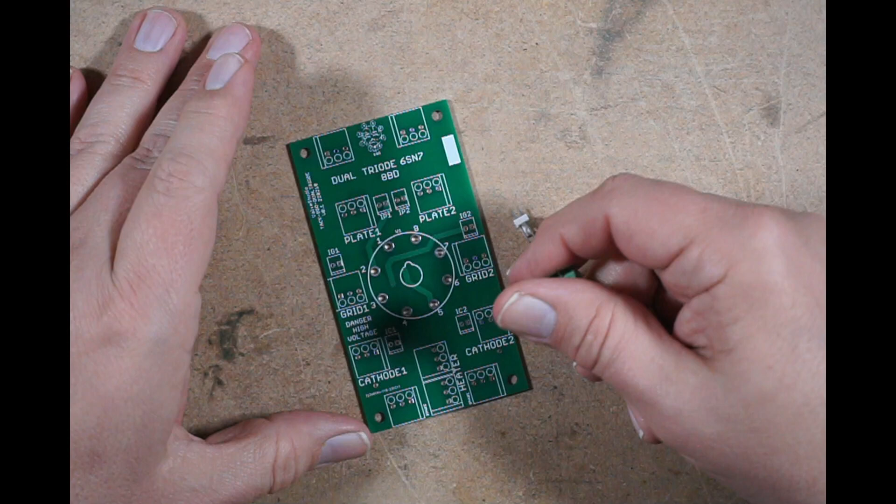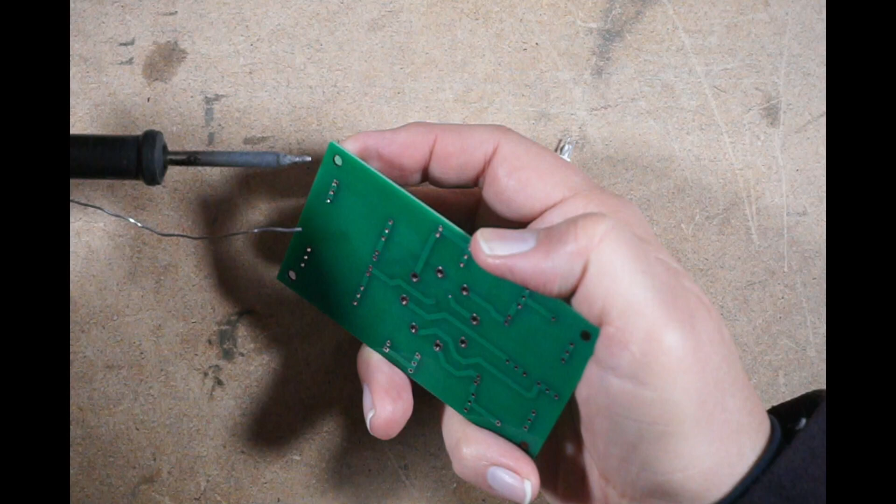Here's my project for today. Let's say I'm going to build this board, which is full of connectors. And you want to solder these connectors on the board. These are all through-hole parts on here. So you put a part on, put your finger on there, hold it on the board, get your soldering iron out, get your solder out, and somehow you miraculously hold all four of these things all at the same time.

And these two pin headers are particularly troublesome because when you hold these guys, you're going to end up burning your finger because the heat transfers right through these pins. So I have a better solution for that. I'm going to show you that today. This is a 3D printed assembly jig for soldering parts on boards. This has got a lot of different compartments at different depths.

So to build this board, you put all your parts on, and you put your assembly jig on, turn it upside down, and solder everything in. And this jig, I've determined all these heights for the different components that I have, and all the components are going to sit flush, and you can check that on the side here. And there's a little bit of an offset here, so you can actually look in and see how your parts are sitting on the board.

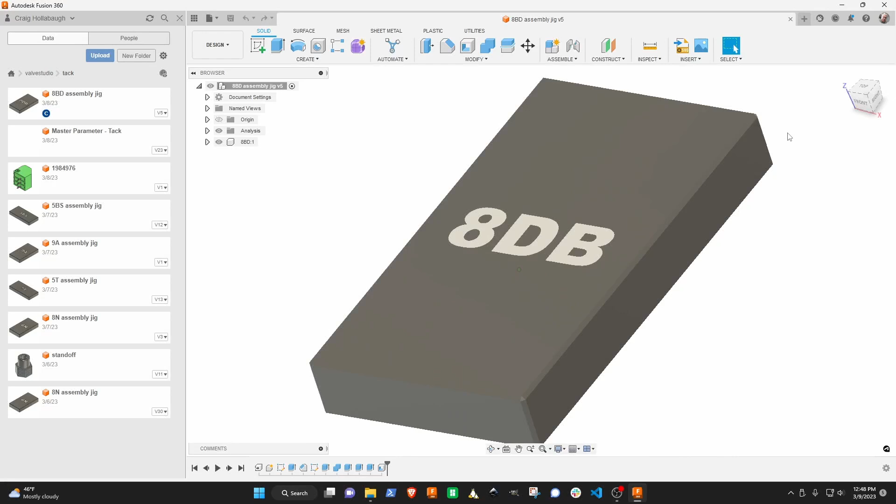If you'd like to see how I modeled this 3D printed jig, well, we're going to start right now. All right, here's the model for that 8BD jig that we just saw. And I'm going to show you how I modeled this up using Fusion 360. Here's the board layout for the 8BD board, which is an octal dual triode 6SN7. And what I want to show you is when I model these parts in the parts library, I made sure that the border outline for the parts actually measured exactly to the part. For the octal socket connector, the 2-pin header, as well as this 3-pin connector here.

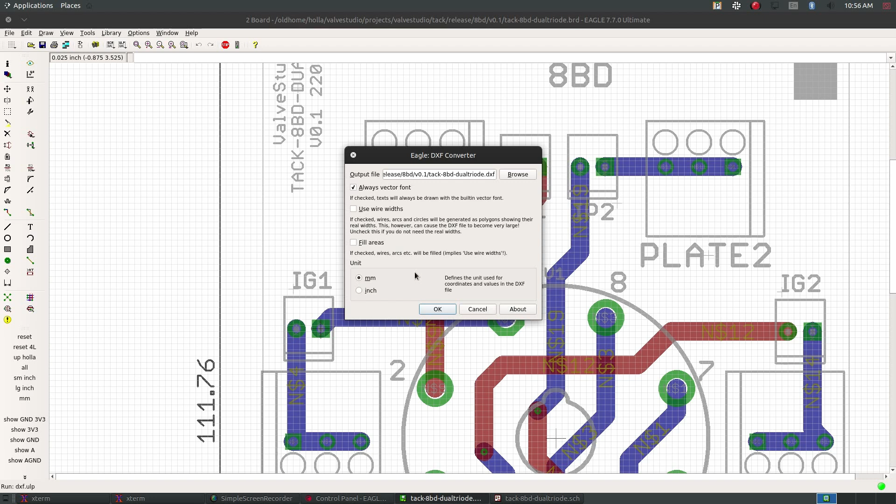This version of Eagle allows me to export out a DXF file of the board itself, turn off things I don't need. I'm going to export it in millimeters. And there I generated a DXF file that I can import into Fusion 360. Let's first create a sketch on the top plane, and we will insert that DXF file that I created. And here it is right here. We'll bring this in.

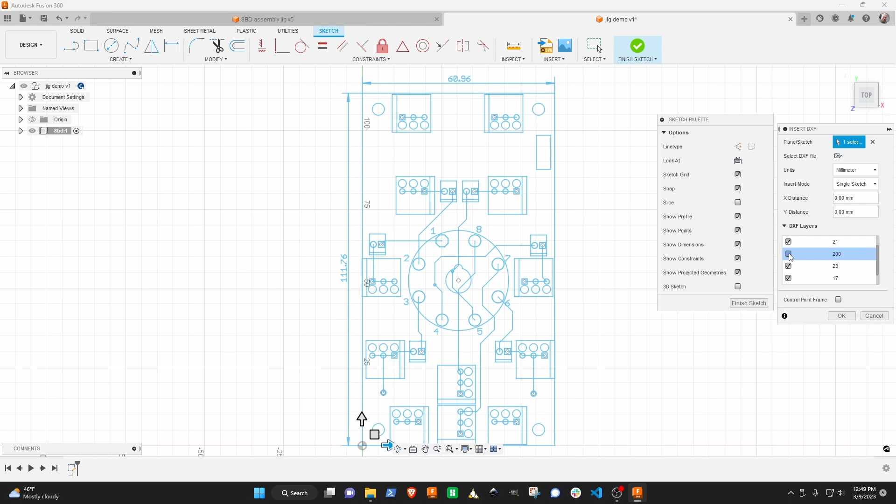And so you can see over here in the dialog box that there's a bunch of DXF layers that we don't actually need. So let's see, number 20 is the board outline. We need that. 25 is the letter silk. We don't need that. 39 is the screw head diameter, the keep out region. We don't need that. 21 is the part outline. We do need that one. 200 is a board graphic. We'll take that off. 23 looks like drill holes, something with vias. 16 is the bottom side copper, and 1 is the top side copper. And 18 are some via holes.

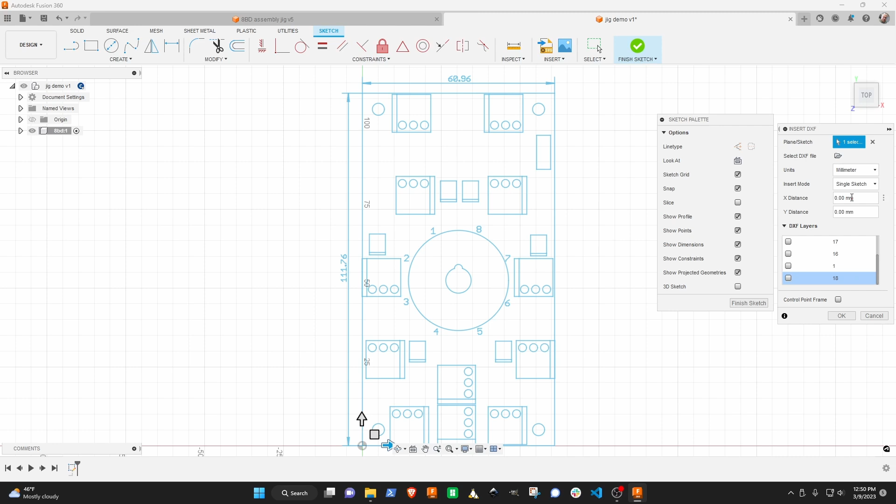Okay, so we'll start with this, and we also want to offset this from the origin. We don't want to be locked in the origin. We'll talk about why that is in a minute. Okay, so we're still on a sketch. Now, I'm going to go in and delete a bunch of stuff that I don't need. So just kind of come in here. We're going to delete this stuff, and you don't need to watch me delete all this, so I'll just speed this up right now.

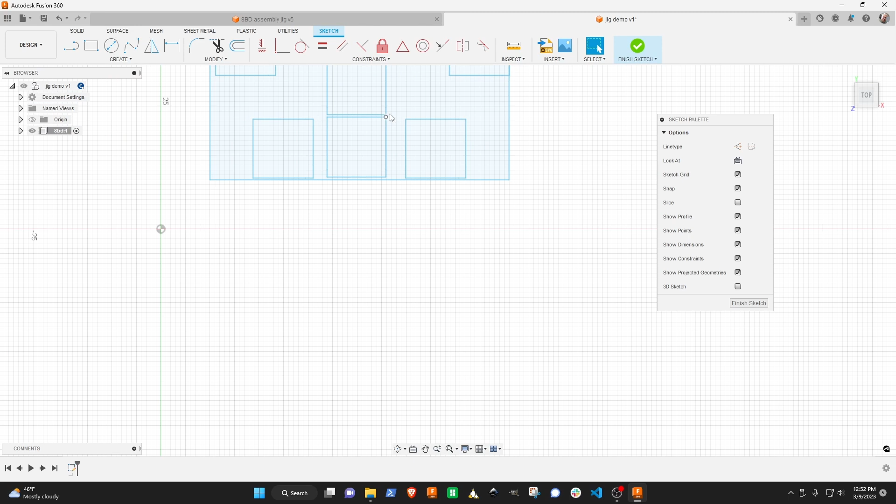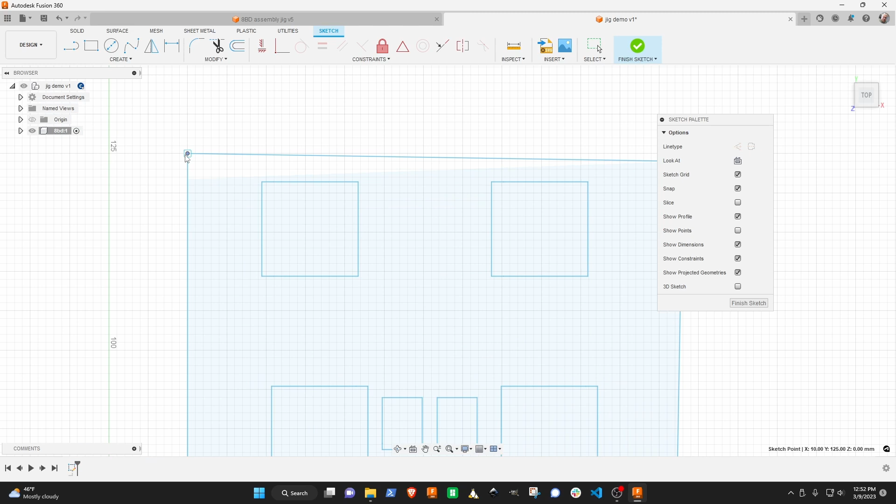All right, so now we have our sketch here. And just from doing a bunch of these, I'm going to tell you that we need to make this outline a little bit bigger. So let's go back in and change that a little bit. We could just drag these corners up, and since I have this snap on, we'll go ahead and snap up to some corners so we can get these lines to be straight.

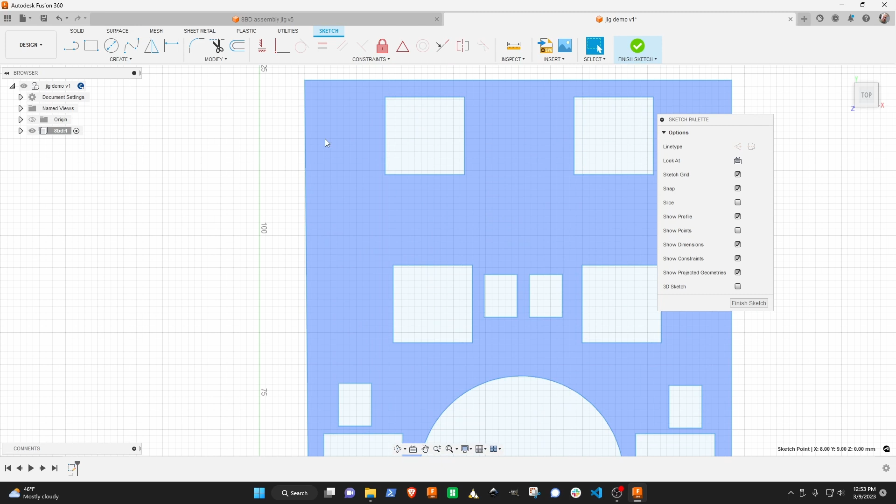So I'm going to come over here like that, and I'm going to move this one over. Okay, so it looks like that. That's probably a little bit too much. We just come back a little bit. Okay, so this one's pretty close. Now these are the exact borders of the parts.

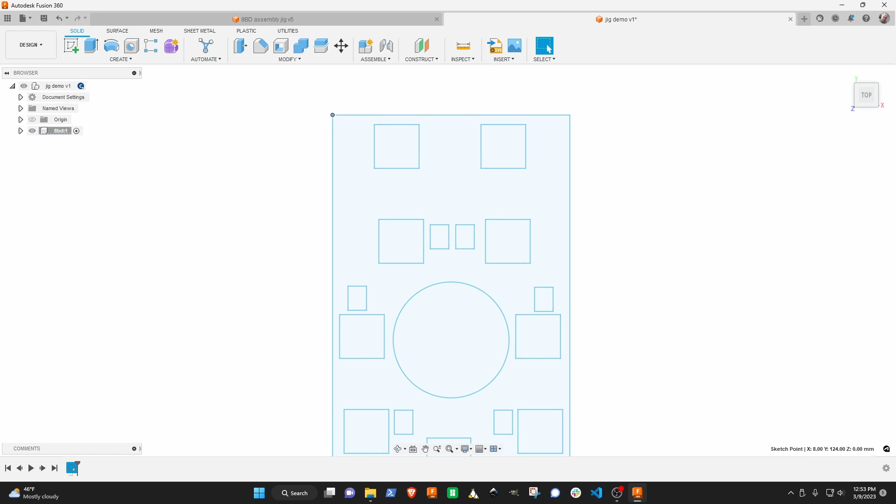So we need a little bit of clearance in here. And so we can use the offset tool under sketch. We can pick that and then we can choose some offset here. But I don't want to type this number in all the time, so I want to show you what I ended up doing.

Over here, you can see I've done a lot of these jigs already. I'm inserting a design into the jig design files that I'm just calling master parameter. If you look in here, there's no actual parts, no bodies, no sketches, nothing, except for the parameters in this file. These are the various parameters that I need to do these jigs. These are measurements that I took, and I actually printed a few of these things and got the spacings

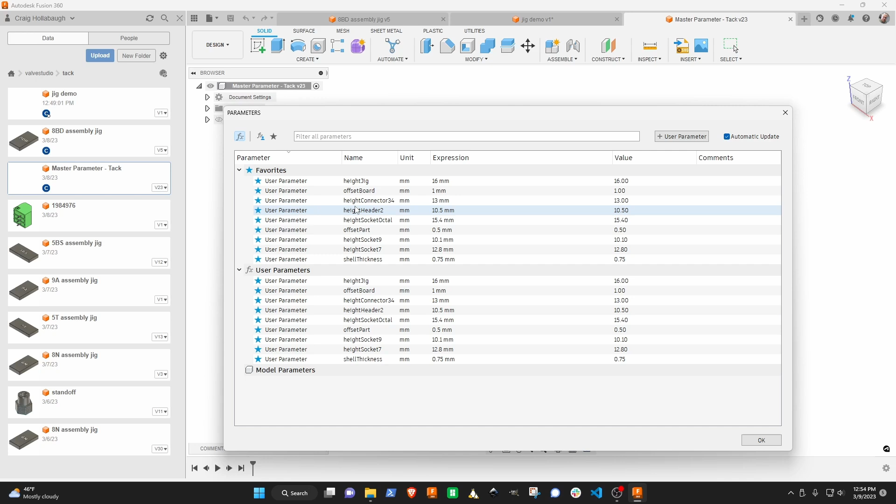all correct. So what we're going to do over in our demo file is first insert a derived file. We're going to pick that master file. You can see here that I can bring in objects from that file, or down here under parameters, I can bring in the favorites.

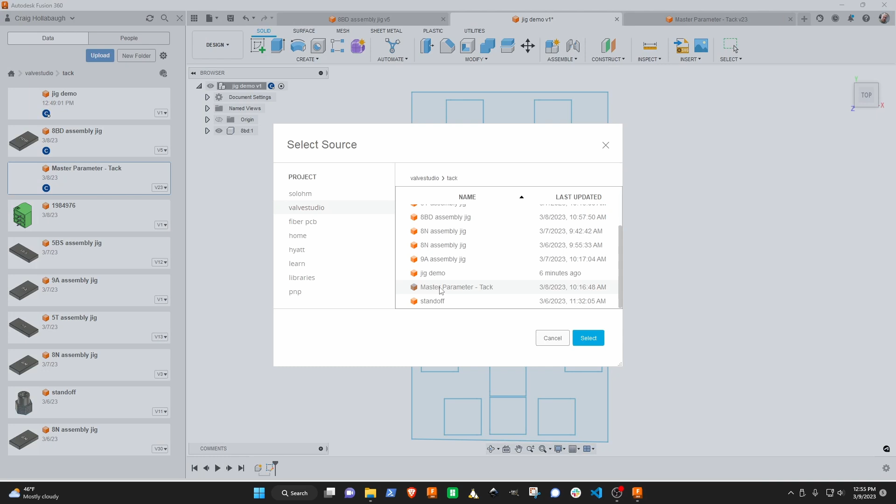Now if I come over to my parameters, you'll see that I have, oh, I didn't do that right. Let me do that again. In order for this to work right, I need to be up here at the top level. We'll bring that back in again. Okay, so we're going to come down here, click on that, and bring in the favorites. Now when I come down, you can see that it added this derived from the master parameter file.

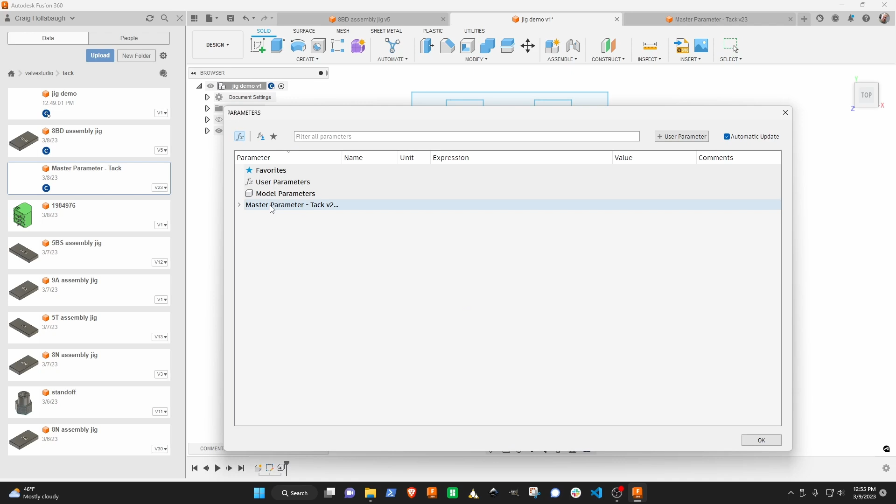If I come down to my parameters, you'll see that the master parameters are brought in to this design. However, they're not actually in this design until I make them favorites. So I bring in the parameters that I want. I can bring them all in. Since we can drag things around in our timeline, and we need these parameters for the entire design, I'm going to slide that all the way to the front. And we'll save this now.

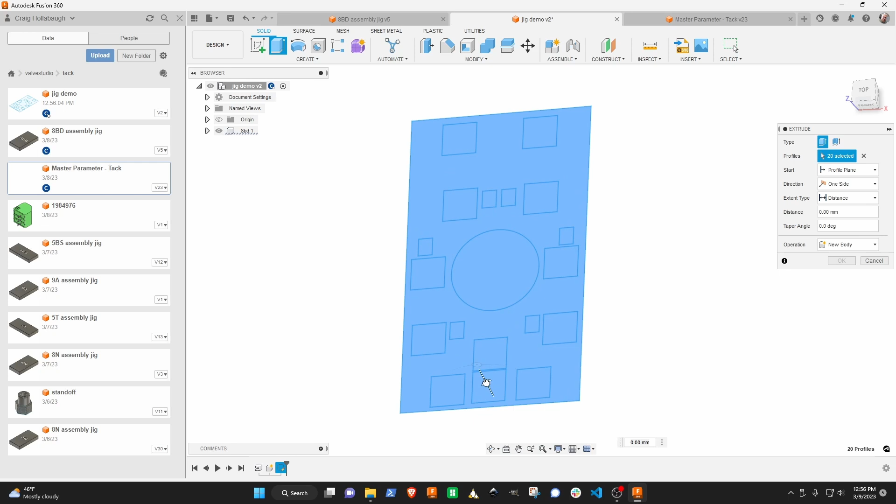Okay, so let's go back in and edit our sketch. The first thing we're going to do is create those offsets using this tool here, and I can create a bunch of them all at once. Well, first let me show you something else. Say I want to do an extrude, and I extrude this whole part up. Remember, we're looking down from the top, so the parts are actually on the top of the board. If I did it this way, now this is looking from the bottom side. Now if I extruded these parts back in

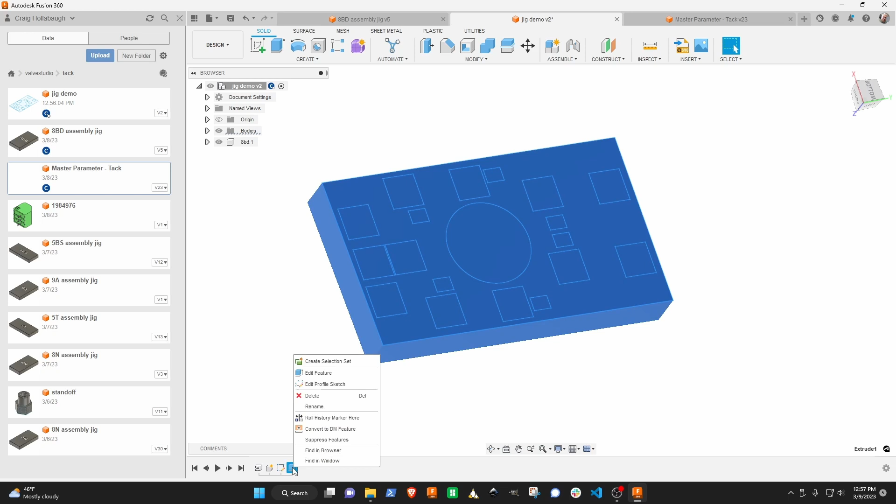and say that this is my jig, this border is the exact outline of the part, and we need to put a little bit of an offset in there for tolerance around the part. So let's delete that extrude and go back in. Let's go add in those outlines. I always want to work on the top side of the board; this is me looking down onto the board. So I need to add these offsets around all the perimeters of all the parts.

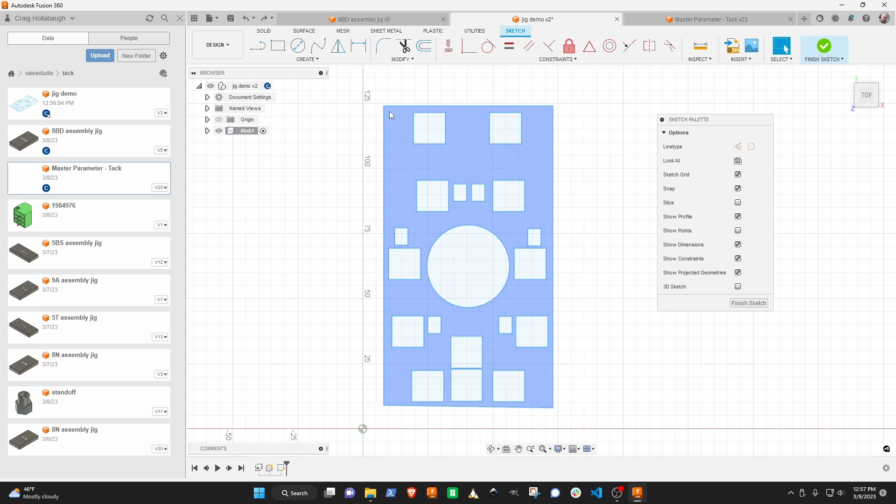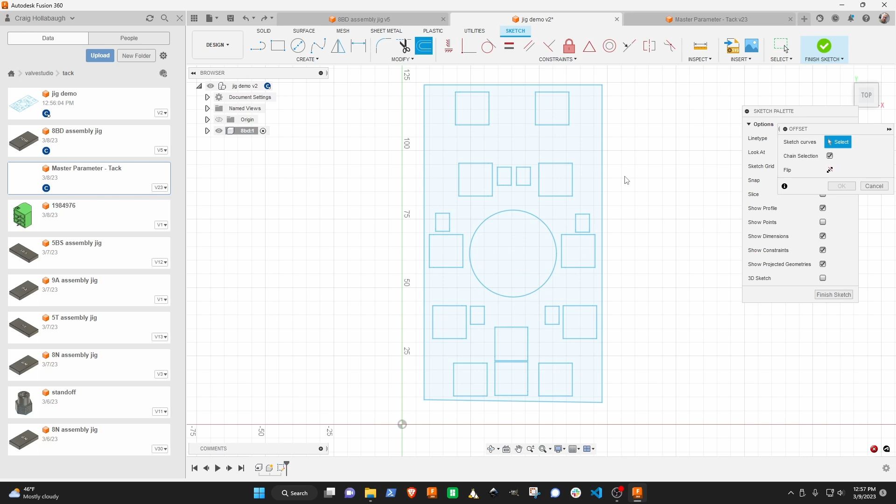So I think that I can come in here and select all these things. I think I can just do it like this. Okay, so now I have all the part perimeters. I can apply an offset to all of them. And I get an error down here that says it can't offset the curves. Okay, so let's do this again. We're going to select all the rectangles, deselect the circle in the middle, hit offset. Except I grabbed this line over here. Let me try this one more time. Turn that off, turn that off.

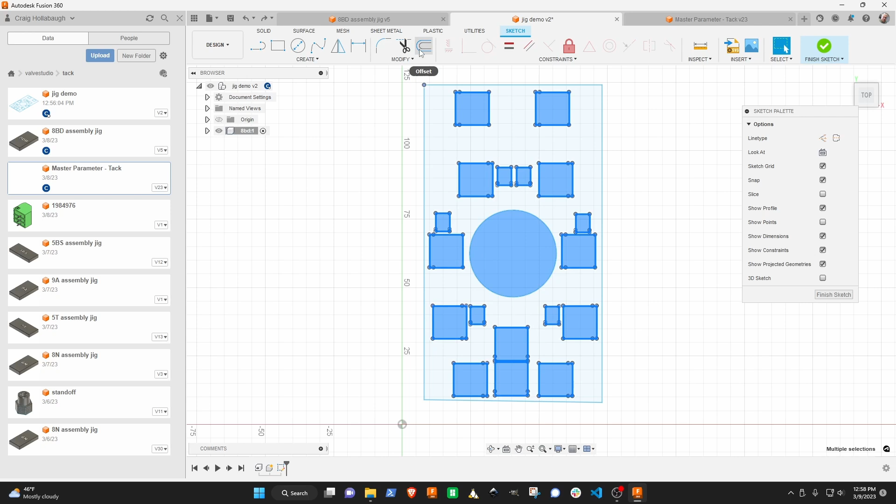Okay, so now I just have the inside perimeters highlighted, and I'm going to hit the offset key. I have a parameter for this offset, and I think it's offset part reference. You also see that these parameters came in with an underscore reference on them, which means it's coming in from my derived file. So that's correct. Now I can set this offset for this part. Same thing, I can name it offset part. And so now we have all the offsets in there.

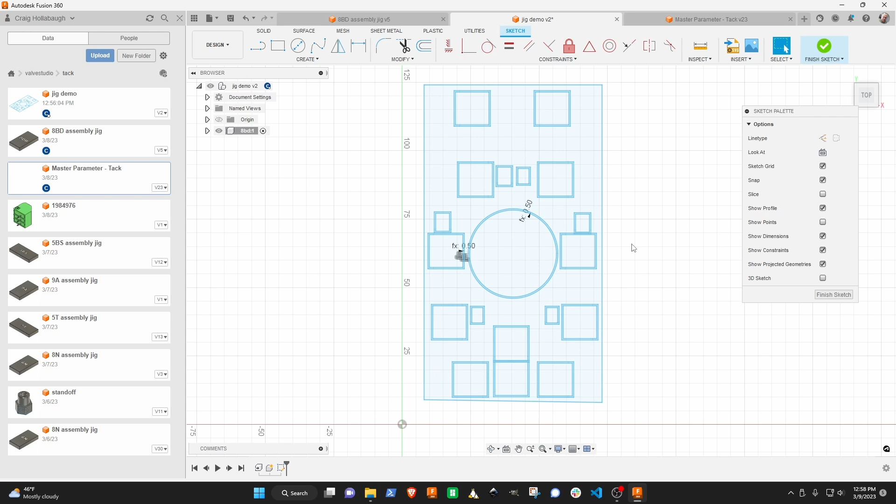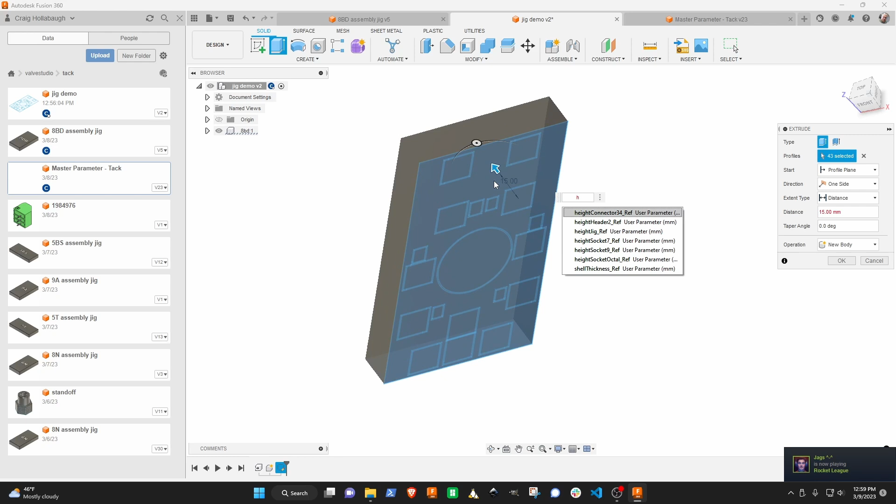So we're going to do our first extrude. Finish that sketch, and we're going to extrude this up from the board by a height that I call height jig. In this case, it's 15 millimeters. So this is what the jig's going to look like. We're going to push some of these down, extrude these down and do some cuts into this part.

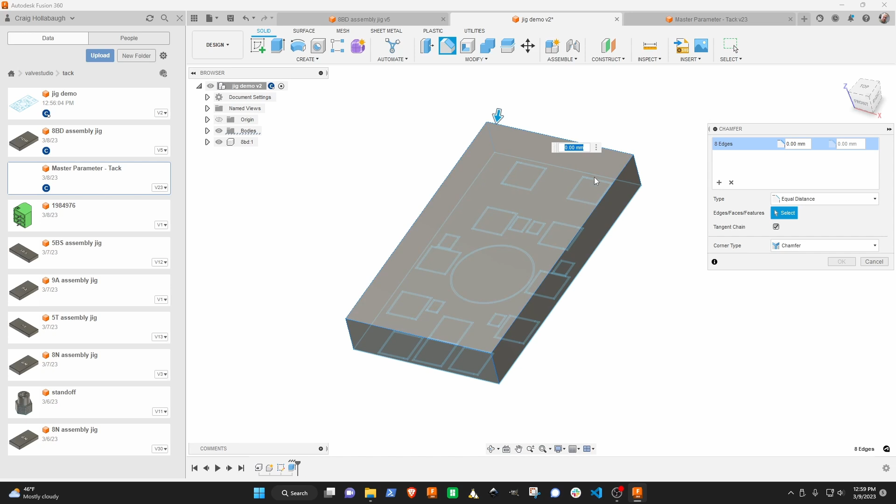But first, let's go ahead and add some chamfers to this body, because we don't want all those sharp corners everywhere. We'll make it one millimeter there. And yeah, we can go ahead and get started at that. Let's go ahead and save our design now.

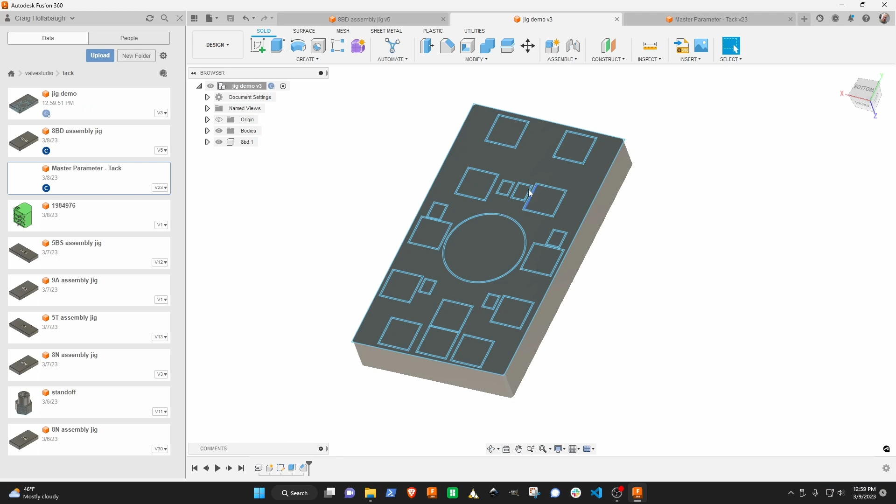This is where it gets a little tedious, but we'll continue on. So these have all these different parts on here, the connectors. Wait a minute, something is wrong here. This one is bigger than that one. Why is that?

Something is wrong here. Well, let's continue, I'll have to figure that out later.

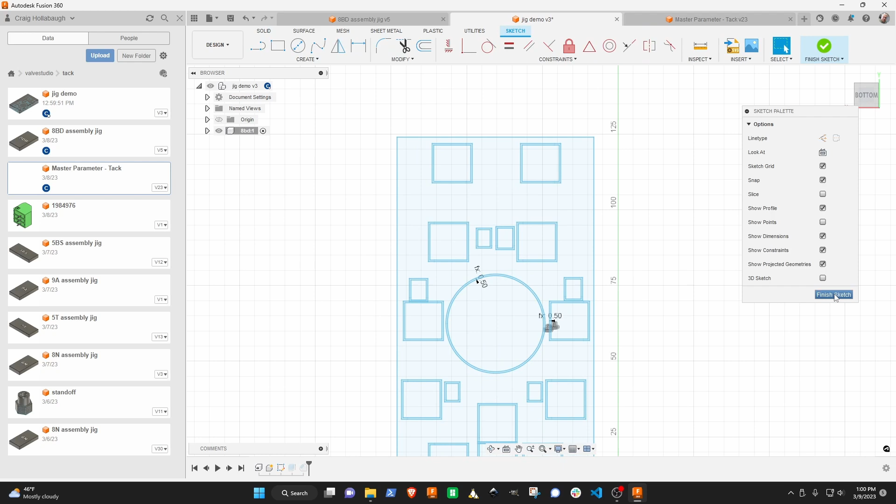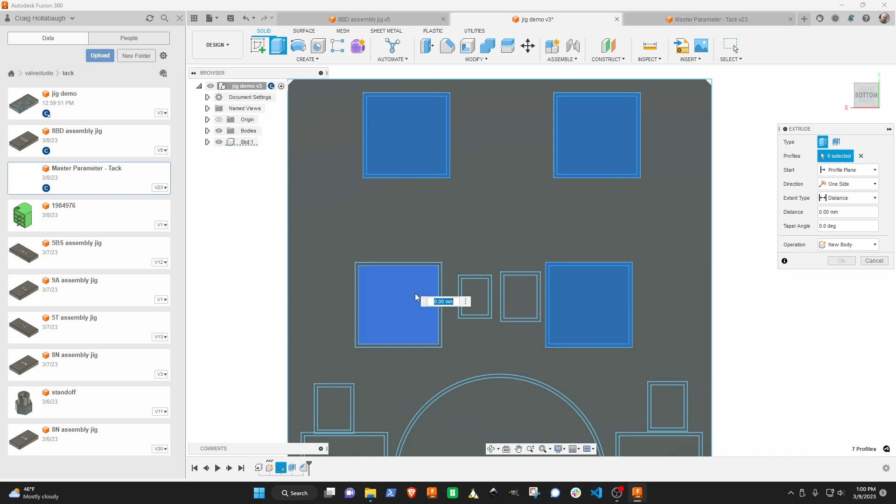Alright, so we're going to do some extrudes. We're going to push these down, so let's go ahead and do that. We're going to do an extrude and pick these, all these parts here. These are the 3-pin connectors.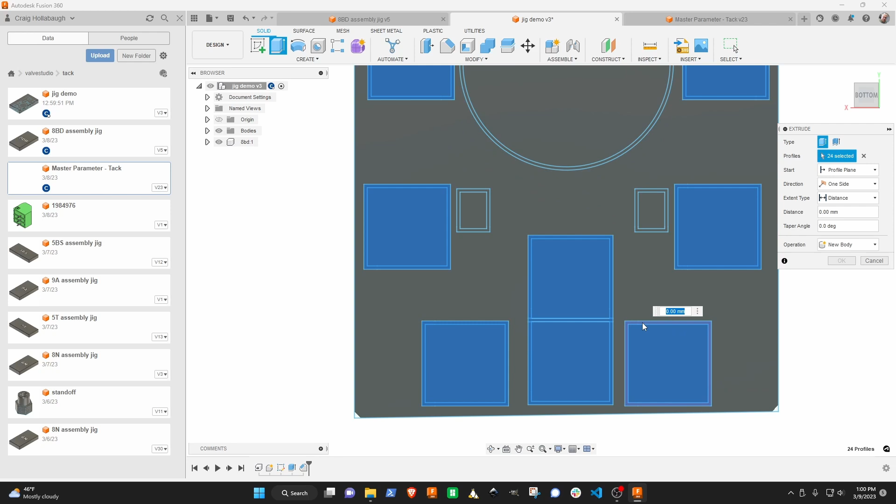Okay, we're going to extrude those back down by a height in here called connector 3-4. And I also want to subtract off this offset board reference—this is what I talked about before. We don't want the actual jig to hold the board, we don't want the board to actually meet up with the jig. We want a little bit of an offset there.

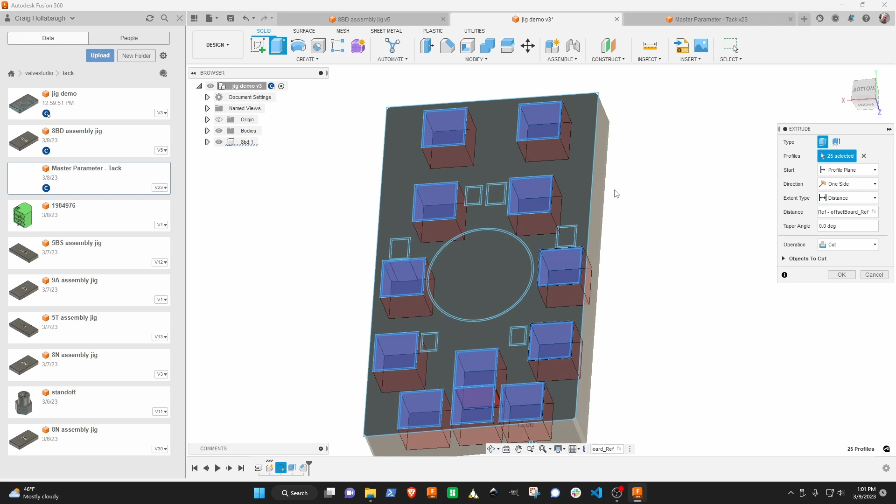So we got those done, and now I have to do these little squares. So we'll do this again for these little parts. I don't know what's going on with that one, but it doesn't matter—you're going to get the gist of what I'm doing.

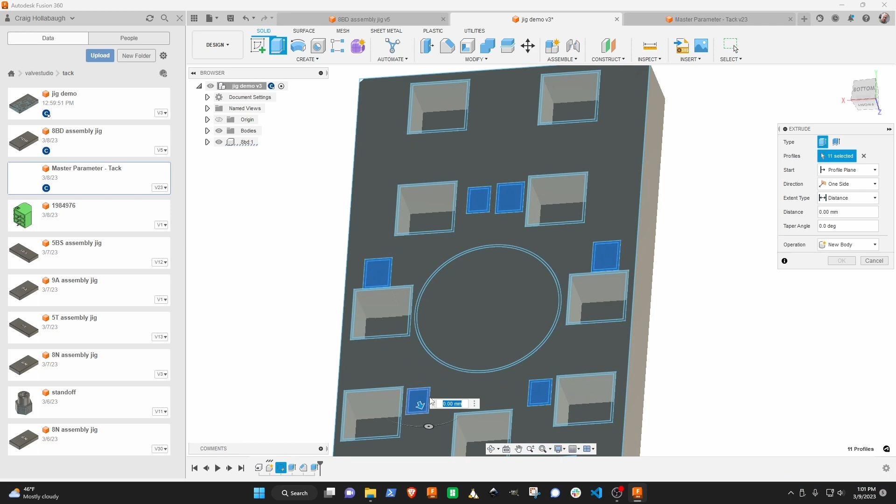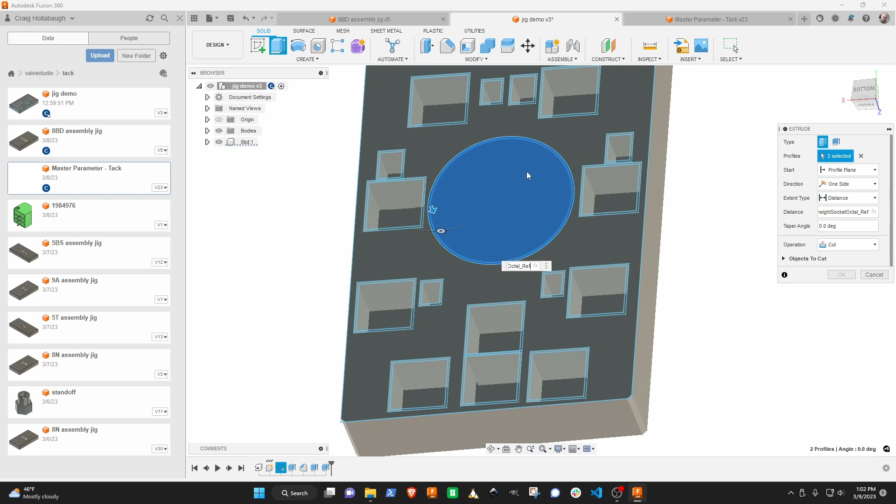And these parts are going to go down by height header 2 minus offset board again. And we're almost done here. We'll get that one and this one. And this is height socket octal minus offset again.

Alright, so that looks pretty good. Now you could take this right now and print this, and it would look fine. Okay, and you can see over here under bodies, close this guy up—you can see under bodies I have one body here.

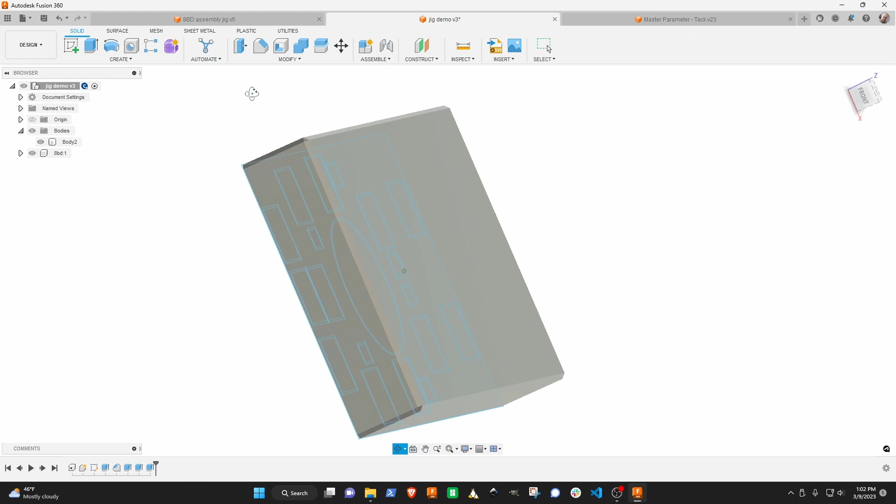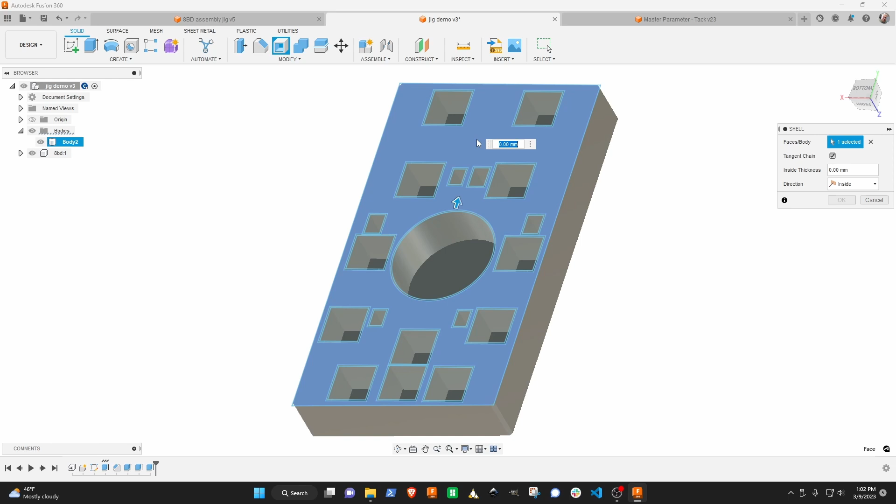But this is going to waste a lot of plastic. If we printed this now, it would weigh a lot, and it doesn't need to be—we don't need to do that. There's one more operation we're going to do on it, which is the shell. We're going to apply a shell to this surface, and I have a shell thickness here, and what that's going to do is shell out where there's unneeded parts.

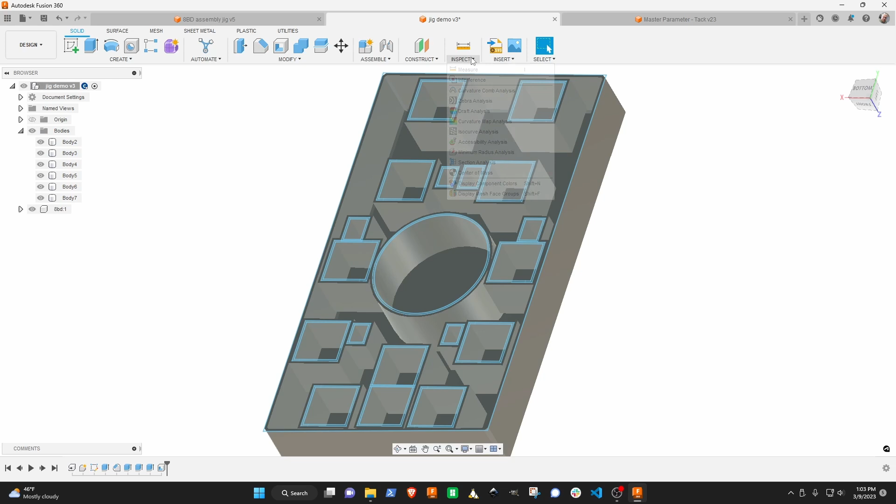And I want you to notice how many bodies showed up over here—a bunch of bodies actually showed up, and you can see that if we do a section analysis and kind of push through here, we look at this one side. Some of these parts are kind of off into space, they're kind of hanging off. That's why there's all these different bodies showed up.

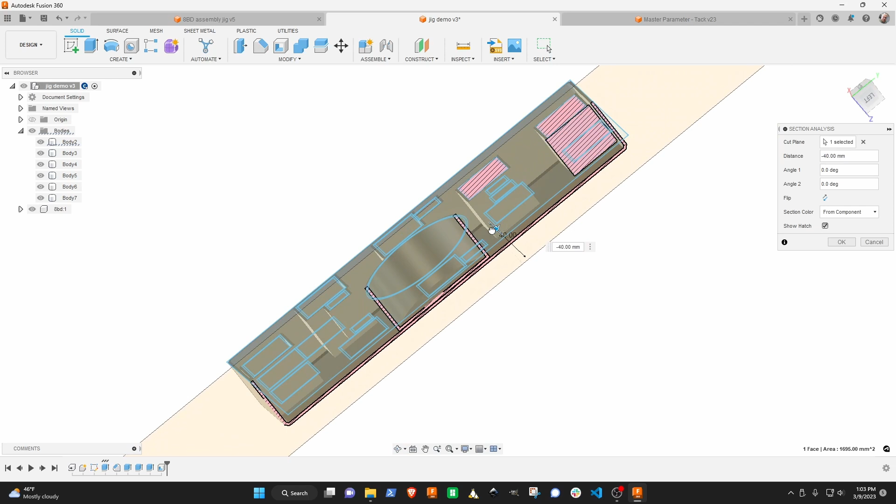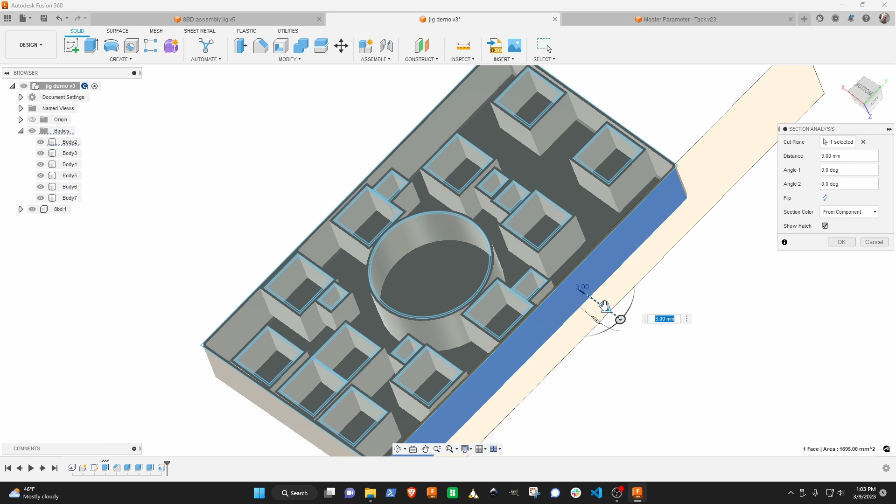You know, like these things right here, these are actually hanging in free space. And that's not a problem because when we 3D print this, in order to print these bodies in free space, there's going to be support material down in this area to hold that in. Normally you want to get rid of the support material, but we're going to take advantage of that when we do a 3D print.

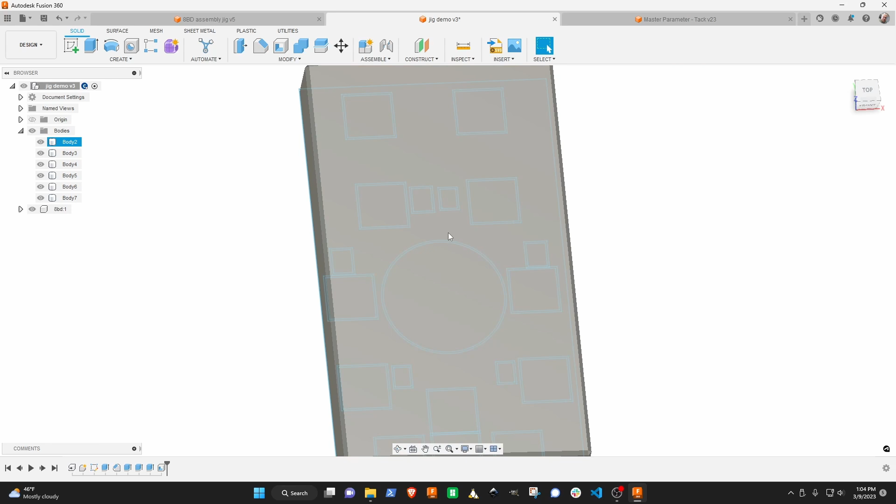Okay, now let's do the label. The label is on this side here. So we're going to create a sketch here on this top side, and we're going to put a text on there. This is using the text tool, and we're going to pick these corners right there. And this is 8DB.

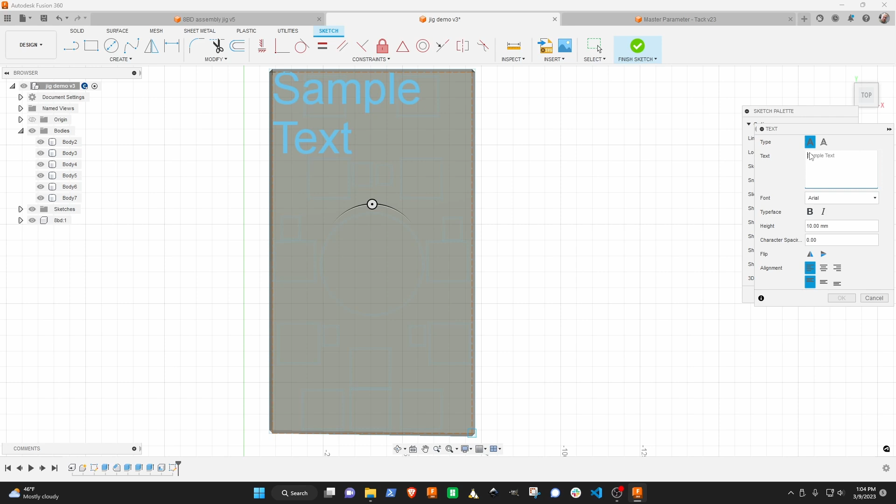And I think I used Arial Black, which is a bolder font. I picked line center for both the horizontal and vertical. And I don't need that bold, but I do want those letters to be a little bit bigger.

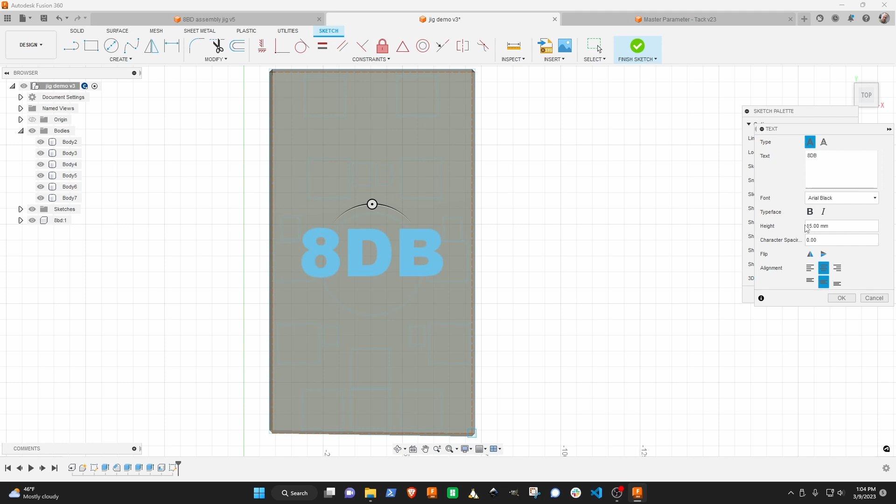Now that just puts some text on there. But I have a Bambu Lab X1 Carbon, which can print in different colors. So I want to extrude this into the surface here, so we'll do that first.

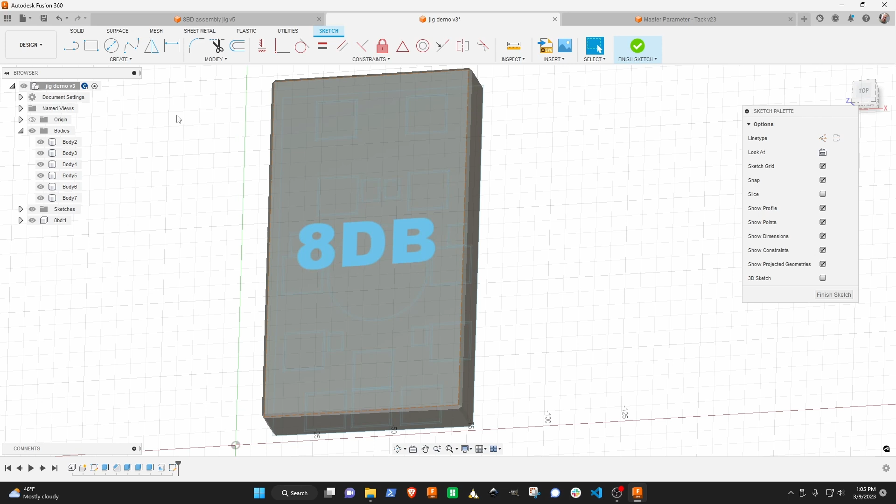Close this up, and we'll do an extrude, and we will pick these profiles. I think we want to pick the individual ones. Let's see if this is going to work. Yeah, that's going to work. We want to push those down.

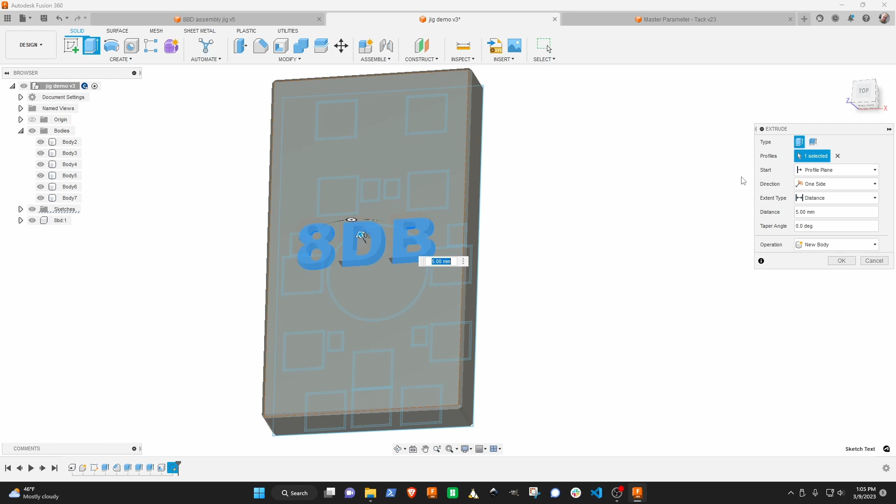So I'm going to push those back into the design by minus 0.4, which is the height of my first layer when I print these parts. And I want these to be new bodies. And what you're going to see over here, when I hit OK, it's going to create some additional bodies.

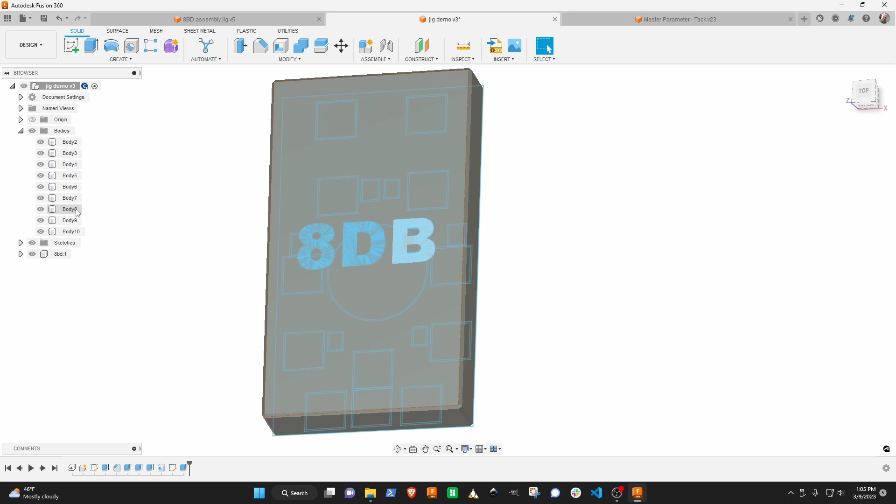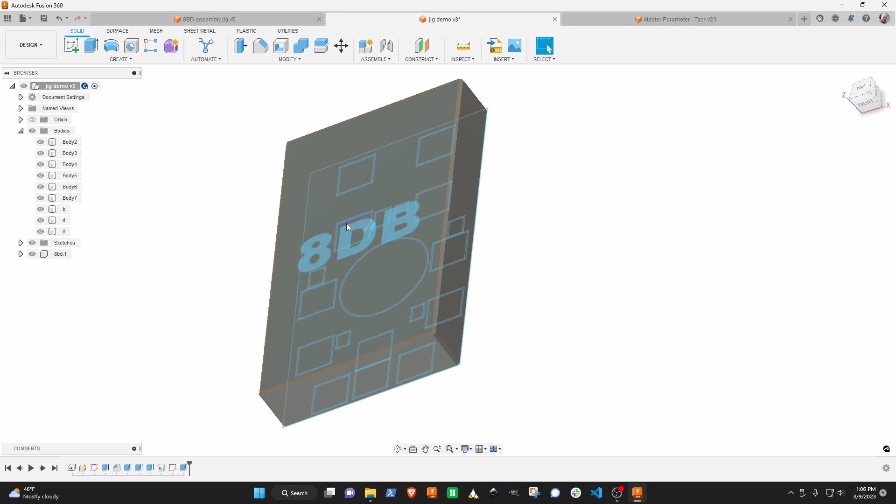Alright, so here's 8, 9, and 10, and we're going to name these. That's the B, this is the D, and this is the 8. But these exist in the same 3D space, and that's not going to—the slicer is not going to know what to do with that.

So we're going to use this combine operation up here. Our target body is the entire enclosure. Our tool bodies are these 8, B, and D.

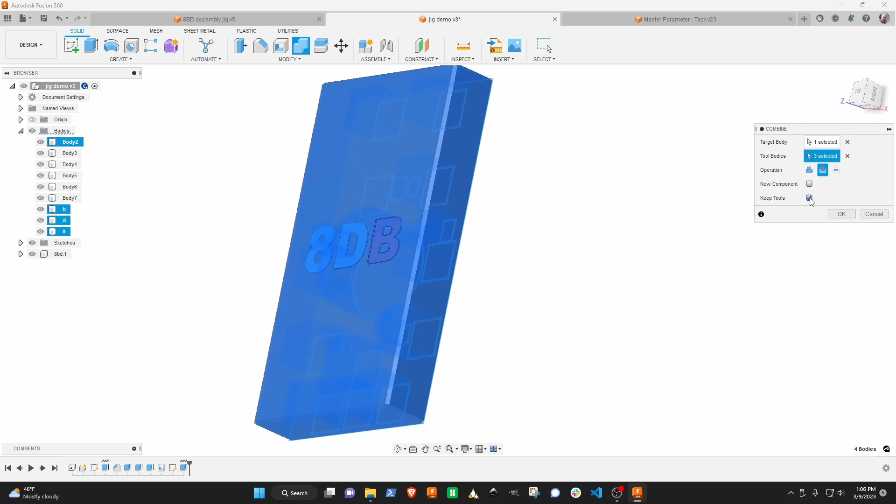And we're going to do a cut operation, and we're going to keep the tools. So now if I come over here and turn these off, what you're going to see is that it's kind of embossed these in there. And I can turn these back on again.

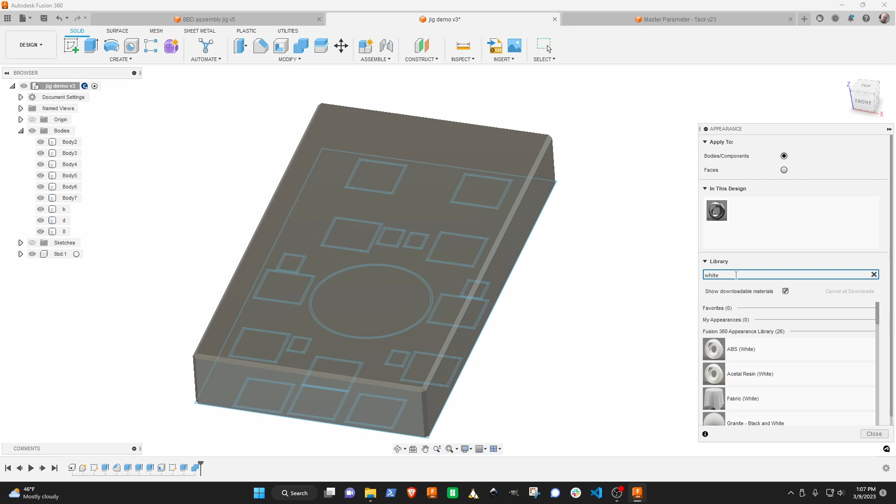If I turn them on, they go away because they have the same color as this thing. So we're going to go ahead and apply some coloring to those letters so we can actually see them. We're just going to grab some white, something white—this is just for visualization here. Turn these sketches back off again.

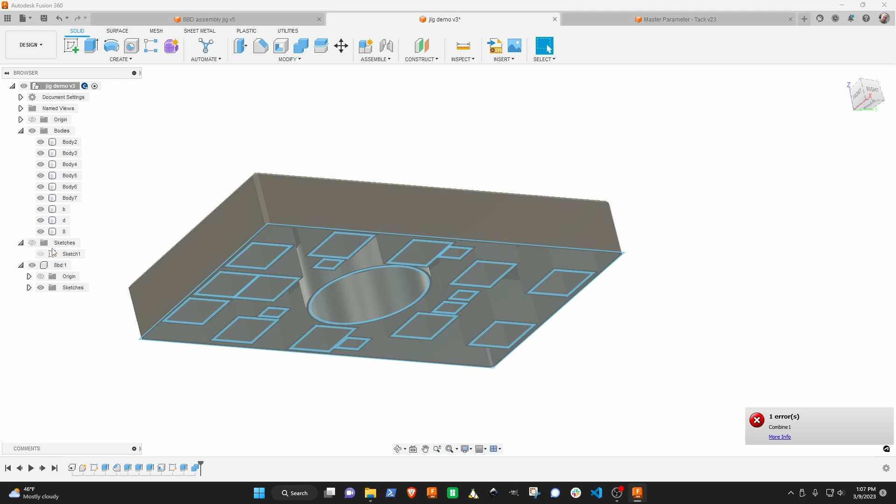Now, I made a mistake here long ago. I'm working up in the top level, and I should have been working down here in the component level. I wonder if I can put these down there. No, I can't do that. I've messed up by creating a bunch of stuff at this top level. I should have been working down in the component. But it doesn't matter, we could fix that, but we're going to keep going forward.

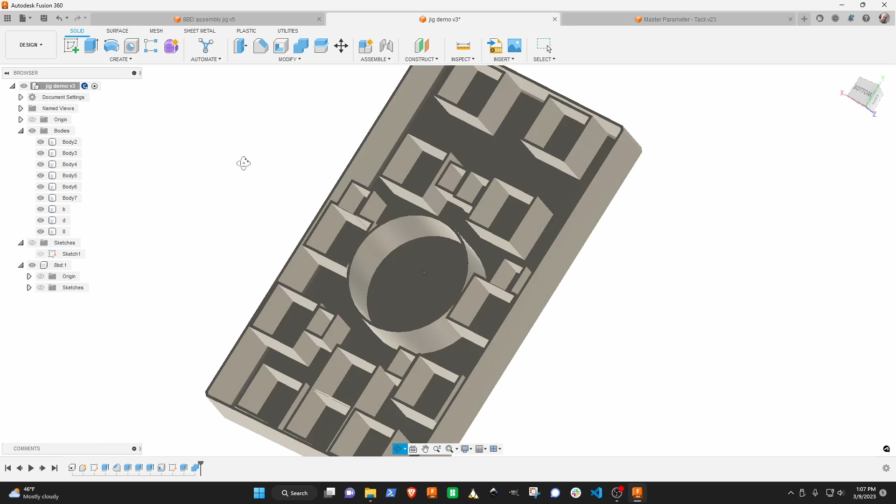So we'll turn the sketches off. So here's our jig.

So we'll go ahead and export our design out as a mesh file. I'm using 3MF as opposed to STL. And we'll save this over here.

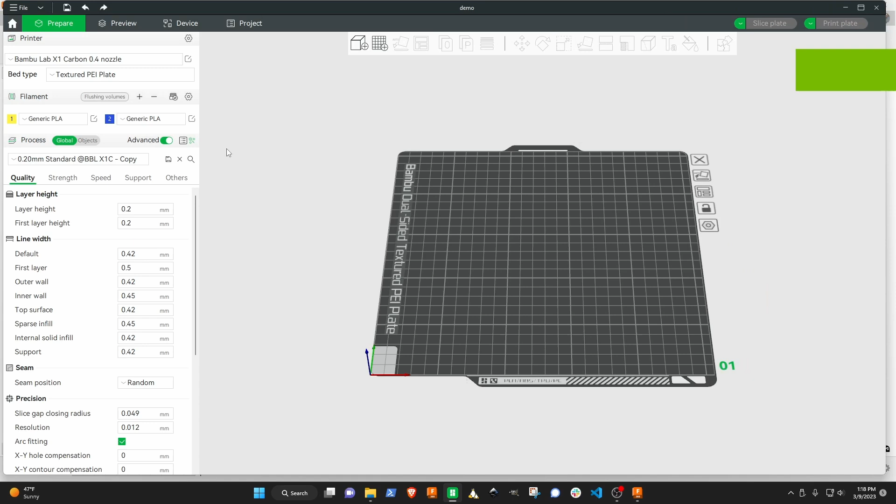And we're going to run the slicer. I'm going to create a new project. I'm going to name it Demo. And then we're going to import our 3MF file that we just created into here. And 3MF has a bunch of multiple objects in it. We're going to keep them all together as a single object with their positional accuracy maintained.

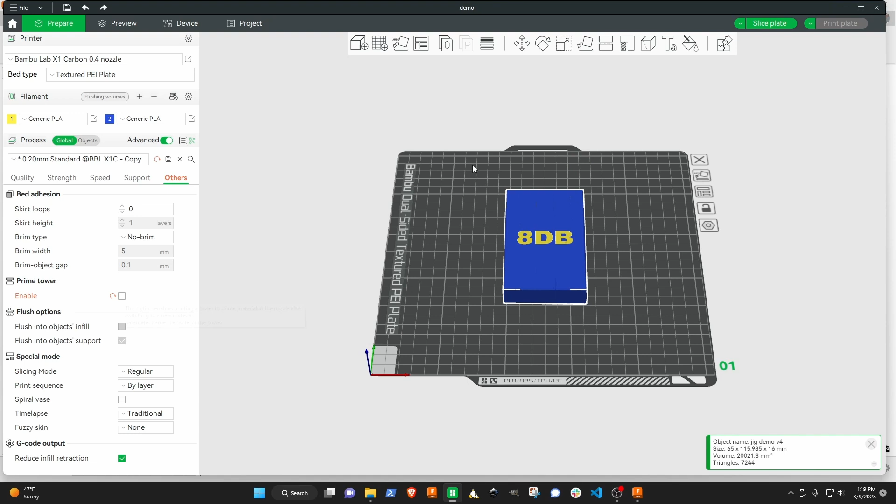So you can see that it's blue and yellow. So I'm going to turn off a few things. I don't need that prime tower. We want to flip this upside down. We don't want it to print in this orientation, we want to print it like this.

And then I want that—you can change the colors here. So the first thing we're going to do is change that one to that. And I think we want this one to be like that. So it's going to print this color first.

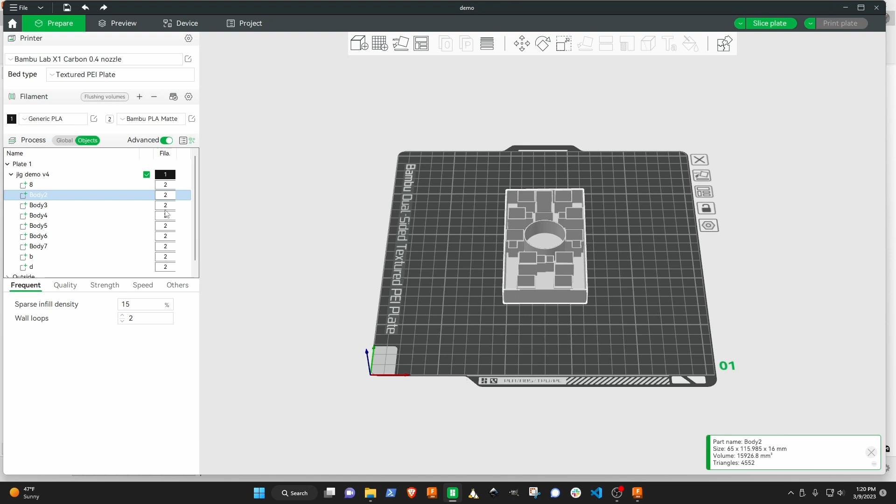So we need to flip the colors in the design. Go in here and we're going to make that. You can see that I have 8 B and D in here, and I want those actually to be white, so I'm going to change these to white. And I'm going to change the rest of them to black. Oops, I'll change those to white. And then I want that one—this one to be black.

All right, so here I think we'll go ahead and slice this. And you see it says it seems it has large overhangs. We should—what does it say more here? We should enable support generation.

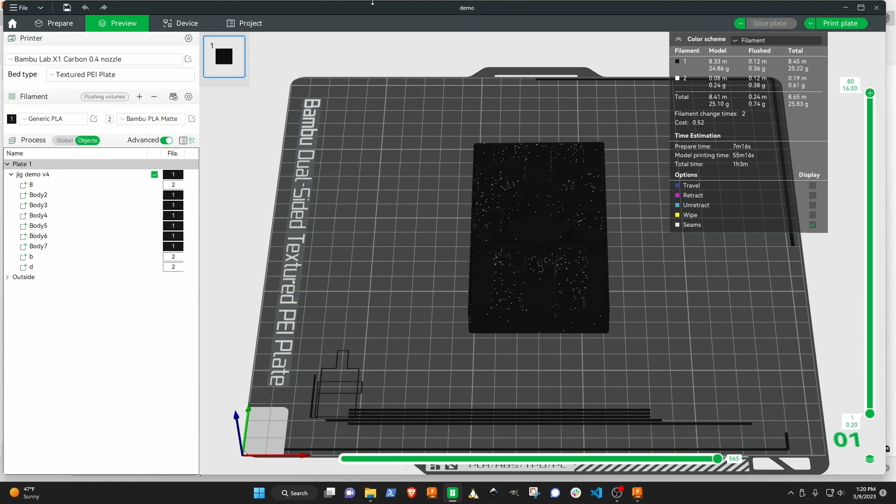So we'll come back over here to prepare, go under global, under support, we'll turn this on. And I'm going to pick a snug style, which is minimal support, to be able to print those objects, because a lot of these are hanging out in space. We'll slice this up.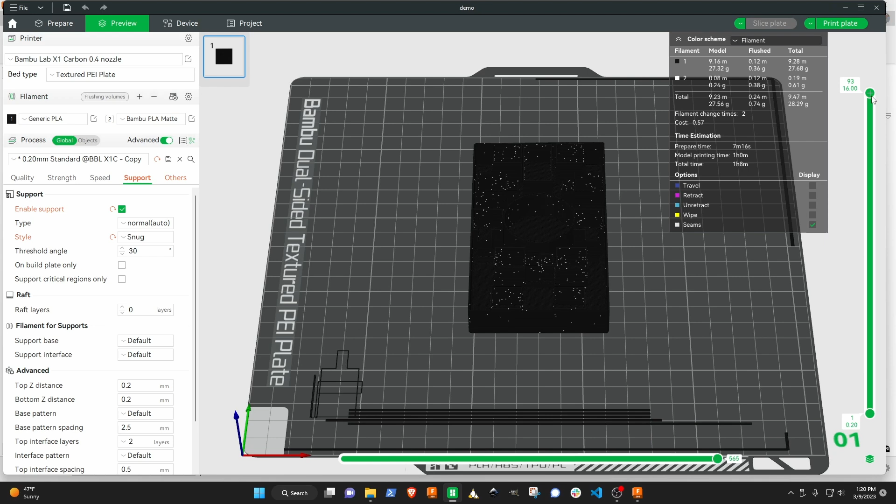And you'll see that it cost me 57 cents. And we'll look at the first layer, how it's printing. So the first thing it does, it prints...

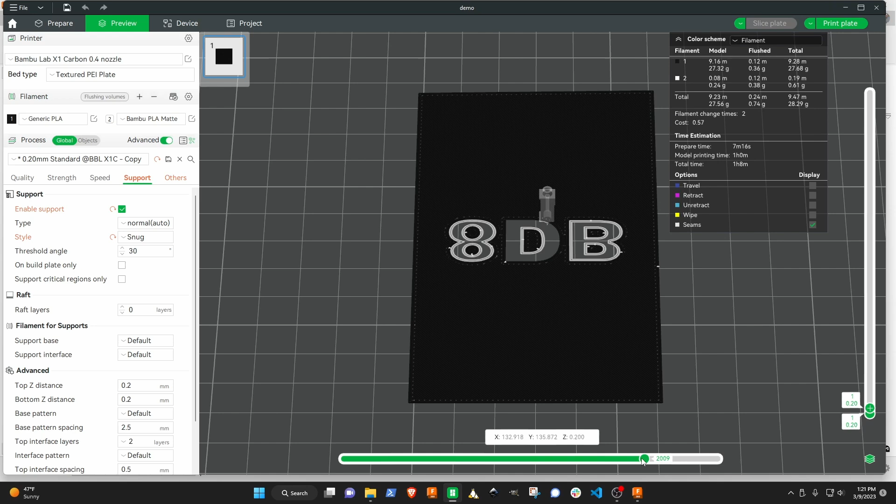All the black. And why this is important to print the black first is so that when these letters come in, they may have problems adhering to the build plate, but the black around there will kind of attach—the white will attach to the black, and then that'll hold it all down to the plate. On the second layer, it prints the white, then it prints the black, and then the third layer it prints over the whole thing. You can kind of see that here. So those are all covered.

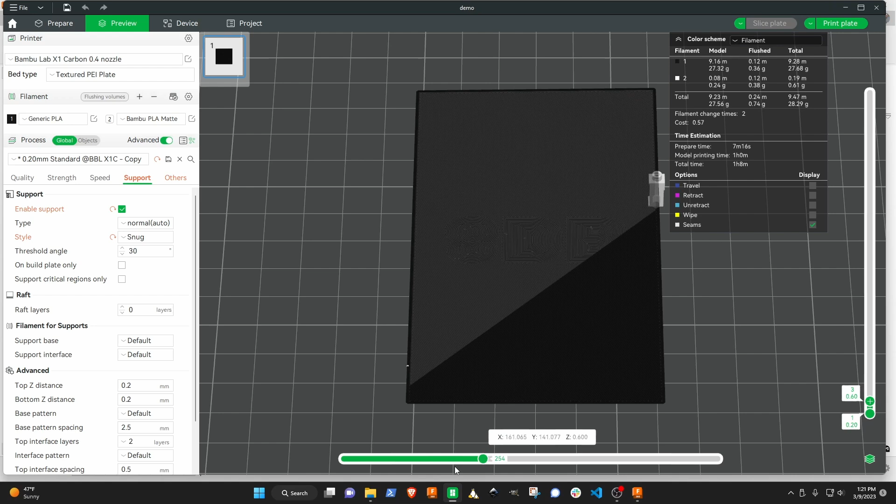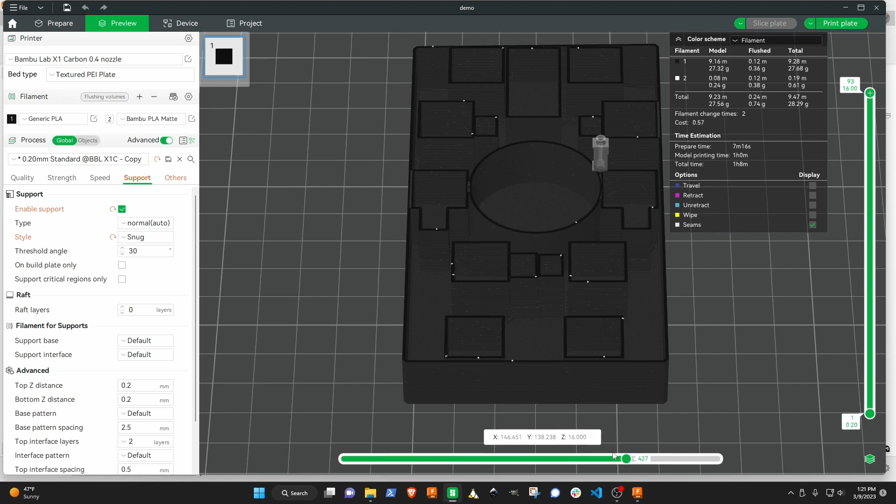Now if we keep moving up into the print, you can kind of see that it's printing all these support layers underneath all those objects that are kind of hanging out in space. And eventually it goes up to the top, and it prints the whole thing.

And then come over here and print it. Let's go ahead and print one, see how it goes. Make sure this is correct here—that black one is... I need to pick this guy here, which is a different printer.

We'll come over here and we're going to send it to the right printer. So I have 2 AMSs, and I want to use the black on AMS number A, and my white is on number 4. So we'll go ahead and turn this on, turn those off, and we'll hit send.

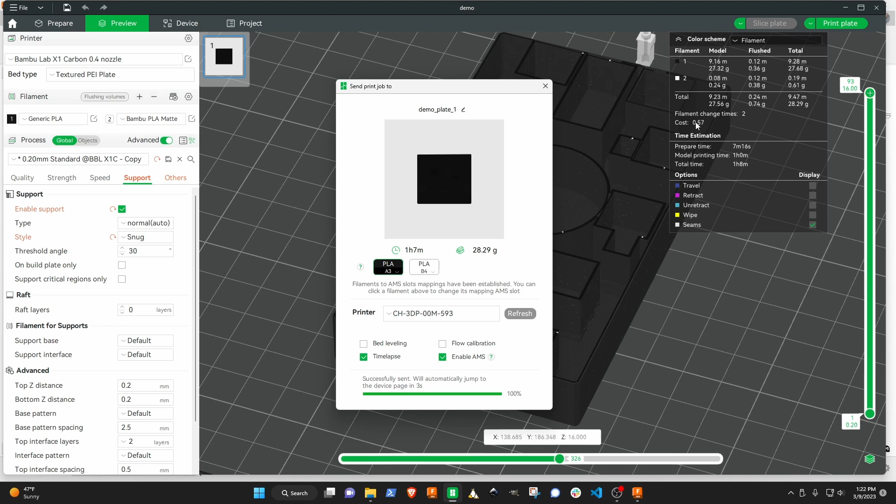And so now we're going to go ahead and print one. This print is going to take 1 hour and 8 minutes, and like I said, it cost me 57 cents. And then it gets ready to go. So we'll go ahead and watch this thing print.